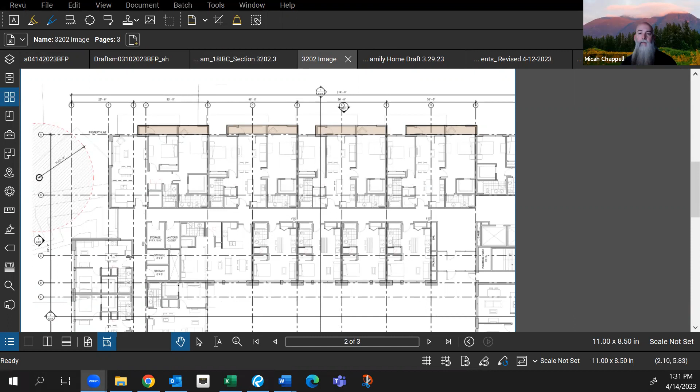But it would be good to hear from the proponent if we have time. I think we have time. Yep, I'm here. I'm Sean Mangeley, the building official up here in the city of Bellingham. I talked to Dustin this morning about this and sent him some images of the proposal. It's a podium style building, and we have some cantilevered floors.

You can see on the shared screen, these extend beyond the property line. This is the street side, so these cantilevered floors extend out over the right of way. This particular one is about 13.5 feet above the sidewalk.

Sorry, I don't have the code pulled up currently, give me just a second. So 3202.3.1 talks about encroachments 8 feet or more above the right of way, and the elements they're discussing are somewhat superficial, not major elements like what the proposal is—these cantilevered floors, floor areas, and exterior walls.

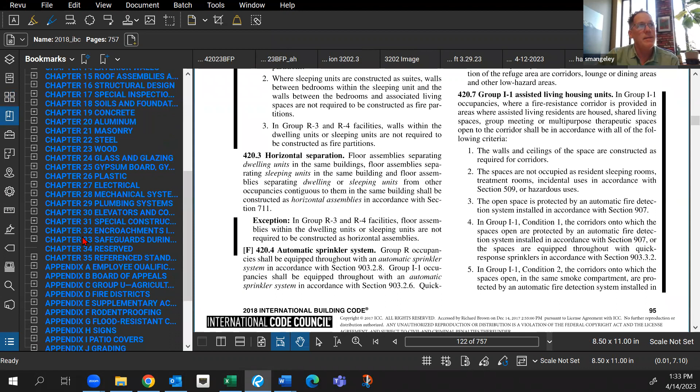So it's my interpretation, or I'm trying to get clarity to see if my interpretation is correct, that the elements pertaining to those projections should be somewhat superficial in nature. I don't think architectural elements are a defined term, so I'm trying to get clarity on whether these floor systems are allowed as encroachment into the right of way.

I do believe 3202.3.3, encroachments 15 feet or above, are not limited. So I'm assuming that major building elements such as cantilever floor systems or pedestrian walkways can extend beyond property lines, even to other buildings over roadways. That's basically the gist—I'm trying to get clarity on what types of elements can project beyond the property line.

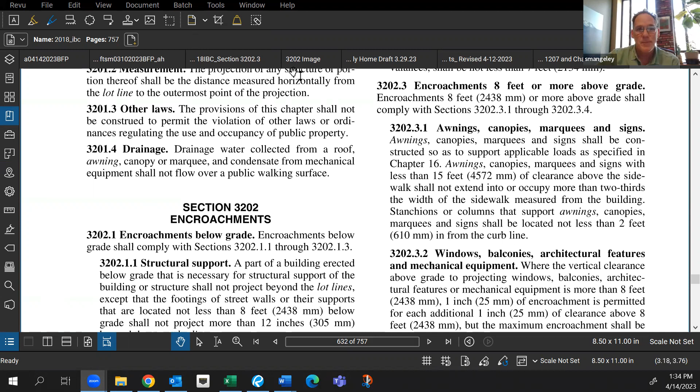You can see, if you scroll down to that first image, that's a previous build that has been built in the city. We allowed that, and I don't think we're obligated to repeat the same mistake, but I don't know if this is a mistake or not. You can see that cantilevered floor—it's not an oriel window or a bay window, it's a fairly significant portion of the building extending beyond the property line, back at the face of the building at the edge of the sidewalk where the exterior wall begins.

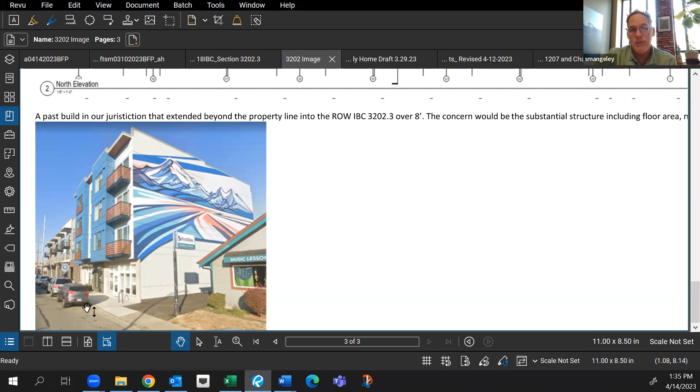So I guess that's one that has been built here. And the illustration above that is the next proposal that another architect is proposing to use. He pointed out that we have allowed it before, but now it was under another reviewer, and we're trying to understand if we made the right call in the first one, or if we need to change our approach for the second plan review.

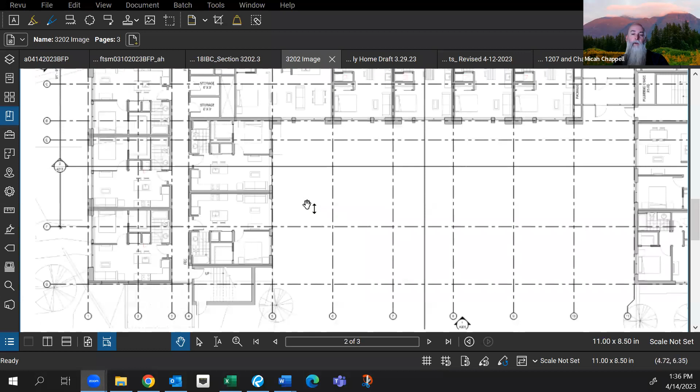So it's helpful. I think we need to do some additional time processing the request based on the information you're looking at here. So I'm not sure if we're providing you the correct answer based on the information you're providing now, as it applies to this specifically.

Doesn't mean the interpretation or opinion is incorrect. It may just not apply correctly to your project. I mean, I can add maybe, if I can, some additional information.

I talked with our Public Works assistant director there, discussing encroachments below that 15 feet, if there happens to be a utility main in front of that building under the sidewalk, and if they need to get in there, sometimes their equipment will extend up to 13 feet.

And if there's a projection of a floor there, that could possibly be a challenge for them to do any type of civil work out there in the right of way. Whereas if it were a sign or something that is movable, not a major element of a building, then that wouldn't be a problem.

They could coordinate that with the owner of the building and remedy it so they could do their work and then reinstall that element. Whereas a portion of the building is going to be a little bit more difficult in getting into those underground utilities in front of the building out in the right of way.

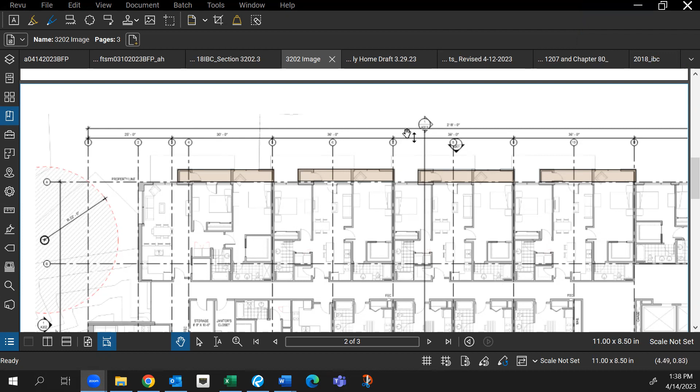Thanks, Stoyan. Quinn? Yeah, I just want to point out that architectural feature is somewhat defined in 3202.2.2. So you can reference that to go along with 3202.3.2. So there is somewhat of a definition.

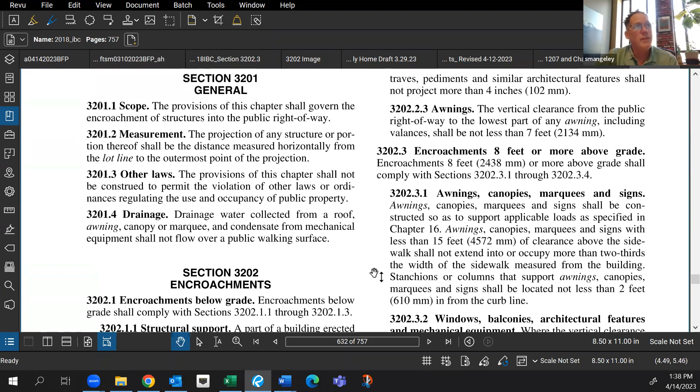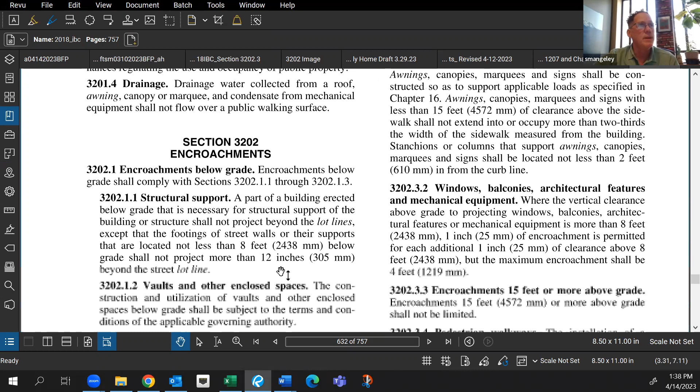Right, yes, I see that, and I guess my understanding with that would be there's columns and pilasters, which are fairly significant features, but everything else - bulk and things that are more kind of features you'd see higher on facades, on masonry type features that aren't floors extending beyond - they're more details with masonry type features or ornate architectural elements.

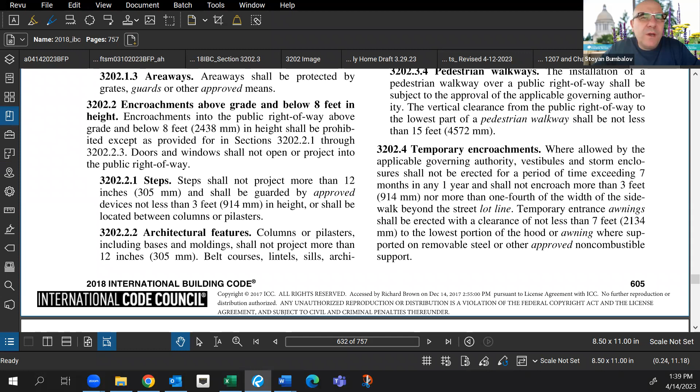What we have as an opinion is basically staff opinion. Dustin did a good job researching this, but since this is model code language, anybody who can provide a better interpretation is welcome to share their opinions.

We wanted to have something to start the discussion, but you can tell in question 3 that even Dustin and I disagreed on something, and I'm not one of those that didn't want to override him. We just wanted to show that there are different opinions, so we need to pay more attention to this request.

So this is all - again, what you see here is not the final version of it. It's just a draft that is proposed for discussion purposes. You can see it on the website, it's posted. Anybody who can provide additional opinion, feedback, information, you're welcome to do that.

Micah? I'll just jump in. Sean, I just want to say thanks for your patience on this. I know it was submitted to the council previously, or to the TAG or BFP previously, and I kind of said, hey, are we beginning to interpret base code language?

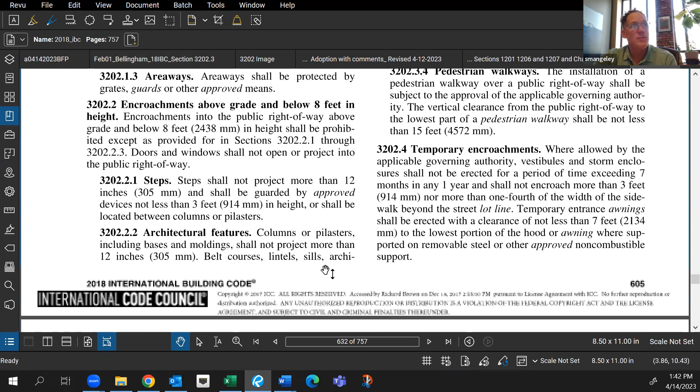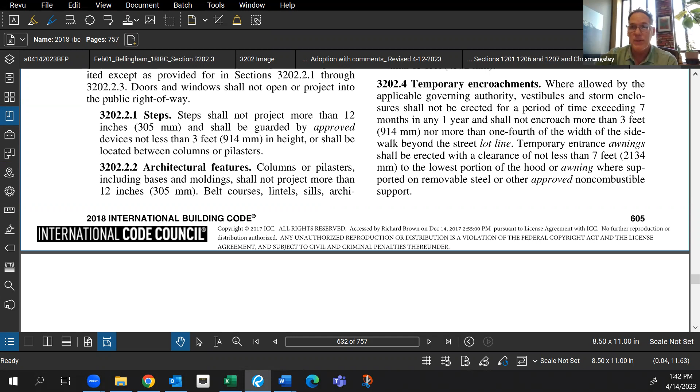So these floor systems we're talking about are somewhat substantial but project further out into the right of way. On this particular project, I've already done a review with the Public Works Director to explain our needs, and he's approved that it's okay if the floor system is projecting. So we're going to allow this to build the way you're seeing in that image. But it would be nice to have some clarity going forward so we don't have large projections for future builds here in Bellingham.

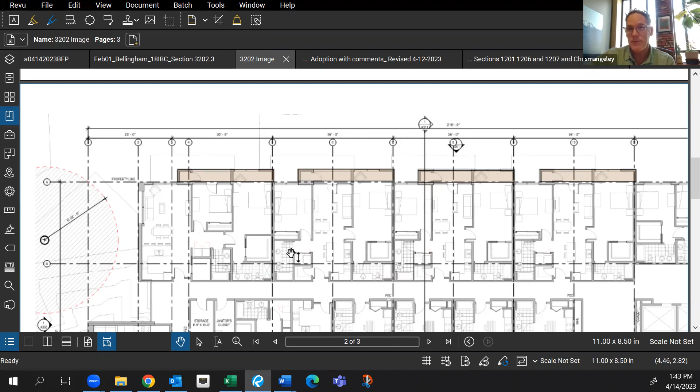Earlier today when we were talking on the phone, you mentioned the flying walkways that go across streets in certain places. I'd be curious how this section applies to those - pedestrian walkways, right? I've seen those, I think there's a few in Seattle. You'll see them fly over the street, connecting two buildings, affording pedestrian movement between structures. I know they're around, but we haven't had any proposed locally. We have some up at Western Washington, but that's over private property, not over the right of way. So we haven't crossed that bridge yet on projections or elements above 15 feet.

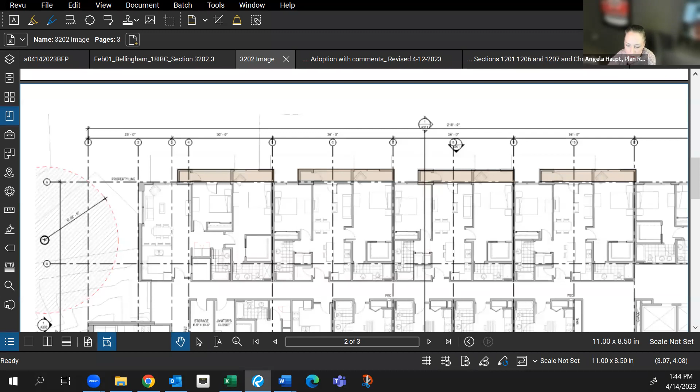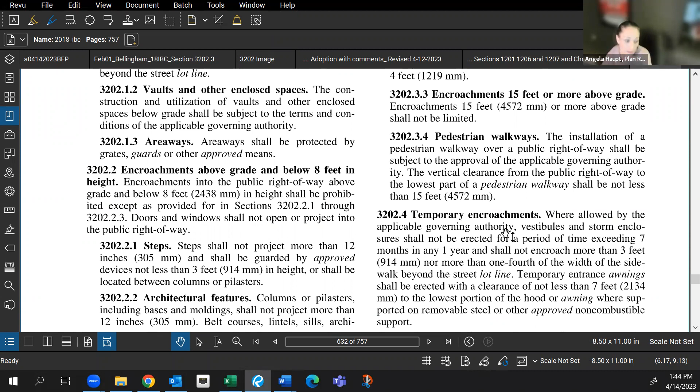Yeah, so pedestrian walkways are specifically addressed at 15 feet or more above grade - they're allowed, that's section 3202.3.4. That's part of where I agreed with the opinion on the first two, that those were both no - and sorry, Angela, plan review supervisor for Kirkland. I agreed that we wouldn't allow those encroachments of floor area below 15 feet. I think the sections above for encroachments 8 feet or more, or from 8 to 0, list out very specific things that are allowed to encroach, and they're minimal encroachments. Then basically you get to 15 and it's just like, go for it, because they're out of the way.

You're not going to impede anything. And as long as - in the scoping it says this code shall not allow you to - provisions shall not be construed to permit the violation of other laws or ordinances regulating the use or occupancy of public property. So if your city's ordinances regulated that and said we aren't going to allow those projections for these reasons, this code couldn't override that. But as it's written just like this, I think it would have to be 15 feet or more above grade, and then we'd kind of be like, yeah, go for it - as long as you're not going over the street, I think then we'd look at it again. But over the sidewalk and into the right of way, it'd have to be 15.

But that's my opinion. Yeah, no, I appreciate that, Angela. That makes sense - that's kind of what we were thinking as well, as far as the 8 to 15 and then 15 on.

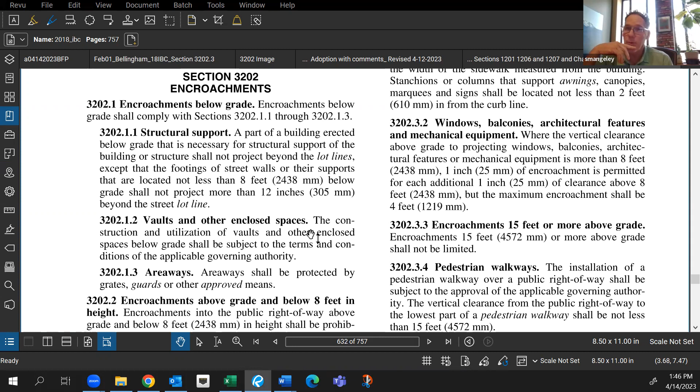So just to reiterate, you guys wouldn't be okay with that proposal if it were under 15 feet, having those floors extended beyond? No, not that second floor. I would say the third floor would be able to extend, but that second story, no. As long as the third story is hitting at 15, I'd allow those, but not that lower one where someone can basically reach up and touch it and do things.

I don't know that that's even the issue, but the code specifically talks about awnings, canopies, marquees, and signs, and then windows, balconies, architectural features, mechanical equipment. And then you jump to the 15 and it just says sure, whatever, go for it. So that's where we would allow it, at the 15.

Quinn was the first one who raised his hand.

Yeah, so Quinn here, I totally agree with Angela on this one. The only caveat I would probably recommend is maybe talking to your city attorney, because the thing I would be concerned with is airspace ownership. So if these were condos and these were being sold, now you're selling airspace of a portion of it into a public way - in terms of legality, how does that work? So this is where I would recommend touching base with the city attorney on it.

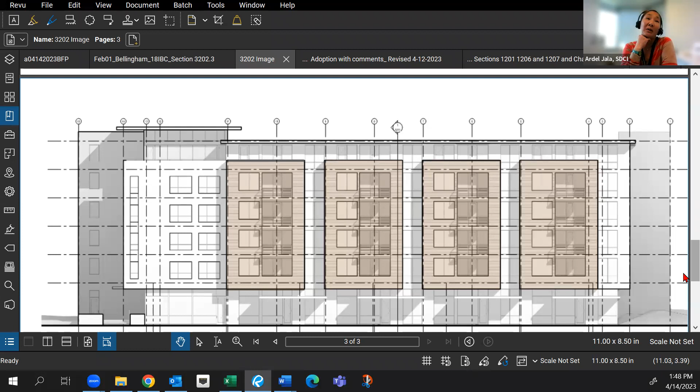But it's exactly the reason your public works person wants this. It's about how we can use that space. We have further language that strikes out the above fifteen, but it's what our public works needs - the ability to sell public access or use of public space is prohibited for anything other than public use. So we'd say no to this proposal, and if we messed up, that was one mitigation we tried to get: removable framing. So it's cantilevered, but in a way that could be demolished without having to take down the whole backspan.

Right, yes, no, I appreciate that. Okay, so back to the airspace - would that not be the same as, say, if it were a balcony projecting? You're still utilizing that space in the right of way. How is an interior space any different than, say, a balcony? I guess I should direct that to Quinn.

Quinn, are you there? That's all right, maybe he stepped away.

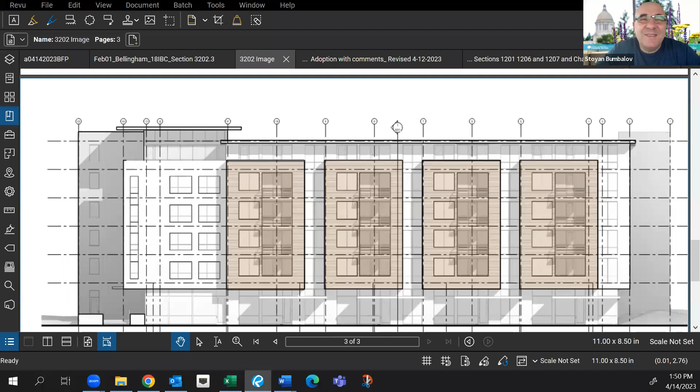To add to the conversation, what if we schedule once per month an open discussion? I think I saw many benefits today, without agenda and without any quorum. I guess folks like to share more if it's unofficial. But of course, I will discuss this with the council staff and with the council.

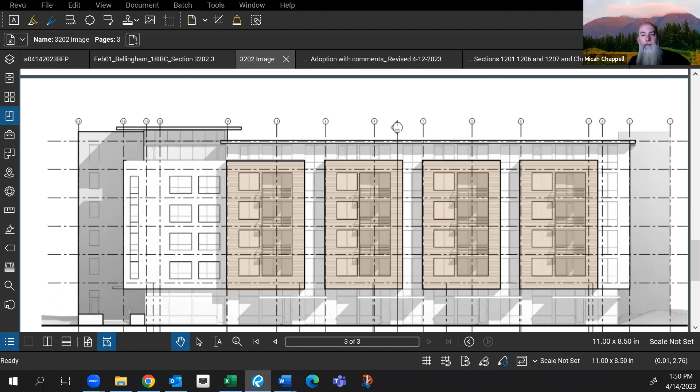Anytime, Stoyan. Are you going to be at the WABO meeting next week? We could put this on our code forum discussion there too. I'm not available to go this time, unfortunately. I'll hit the next one. Thanks, Stoyan. Micah, I don't want to compete with the WABO forum. You're not, this is a good location as well.